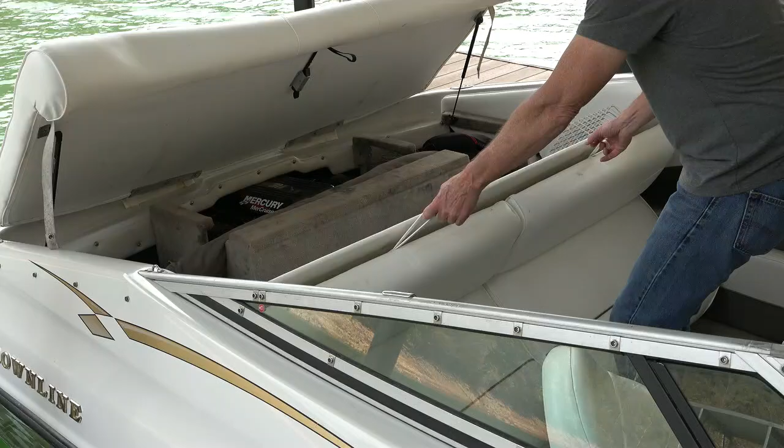You can do it with the little earmuffs while it's all out dry docked. That's another way to do it, and I'll show you how those earmuffs work when we get to putting the coolant in the motor. But the first step is to get access to the motor, which includes pulling up the back part and then pulling the seat forward. This is an important step so you get good access to the engine.

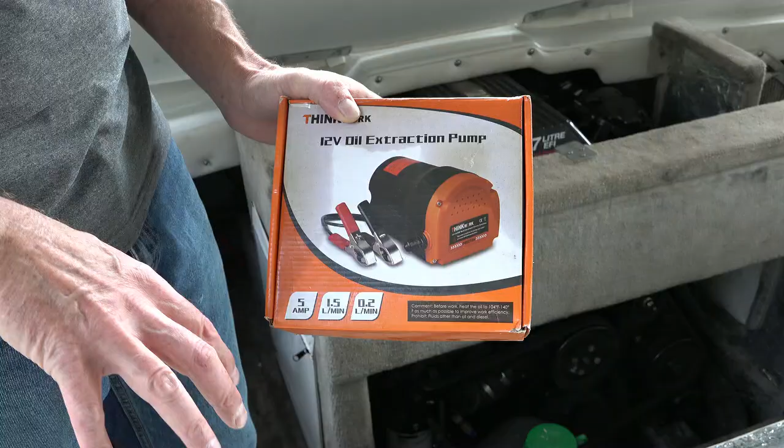Alright, so in this next step what we need to do is to get a little pump like this one to extract the oil from the dipstick into your container, and it needs to be warm to do this, otherwise this pump isn't going to work. There are a lot of pumps. This is just one I've used. It's worked pretty reliably. It does a pretty quick job. And I'll show you once I get everything inserted into the dipstick and start the process.

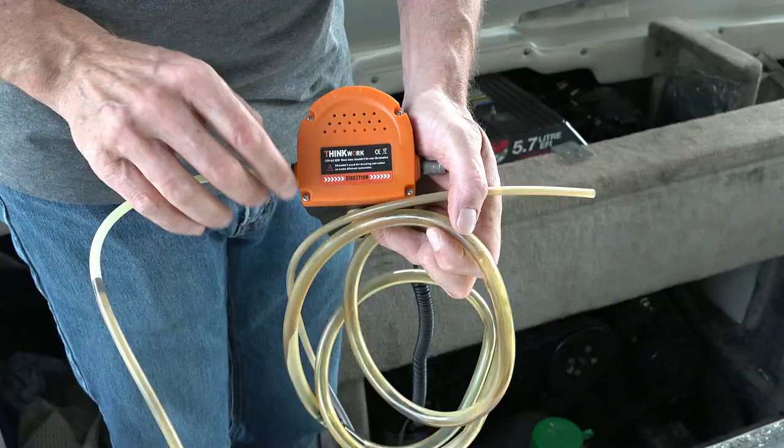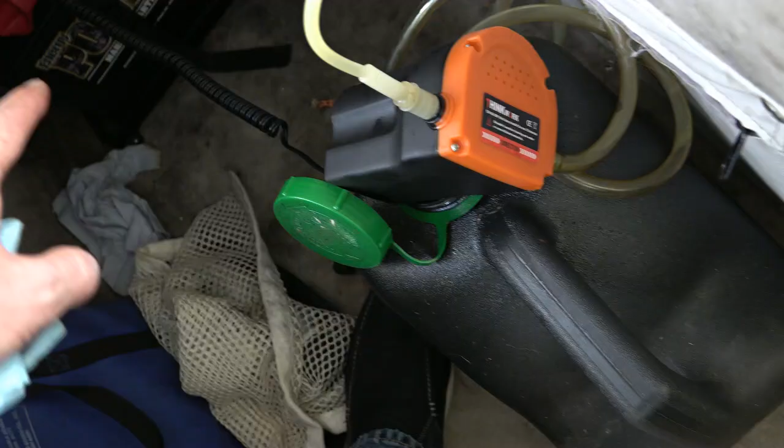Alright, on this pump you can see that there's a direction where the oil is going to go this way. So the real thin tube is going to go into the dipstick, and on the other side is going to go the thicker tube that's going to go into the refuse side where I'm going to dump the oil. Alright, here's your pump. I've connected the pump across the battery. You got a red clip and a black one, so they're connected. The pump is hooked up.

You'll see that this tube right here goes into your dipstick. I just pushed it down in there, and then as I turn the pump on, my goal is to make sure there's oil flowing through this pretty quickly, and I might have to adjust this tube by pushing it in and out to make sure I get good oil flow, which will be obvious. You'll see. Okay, here it goes. See how the oil's coming up?

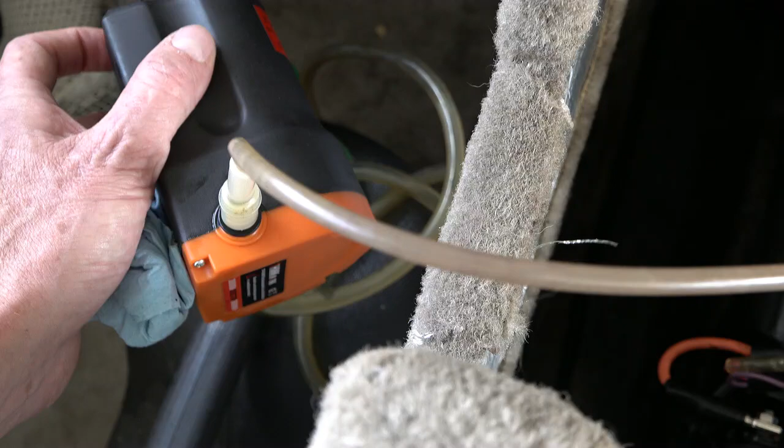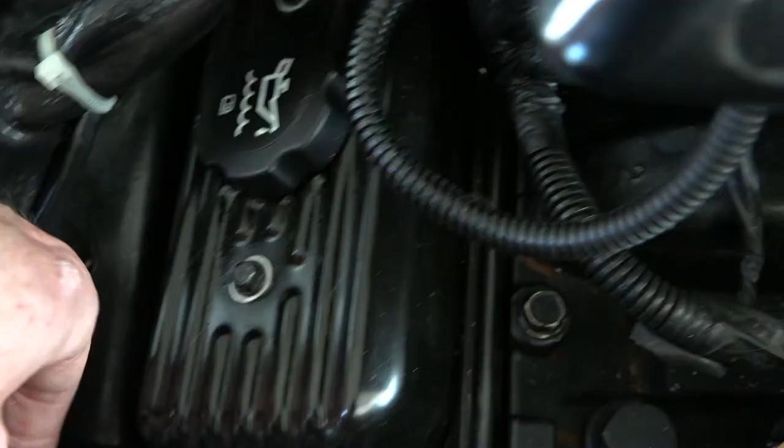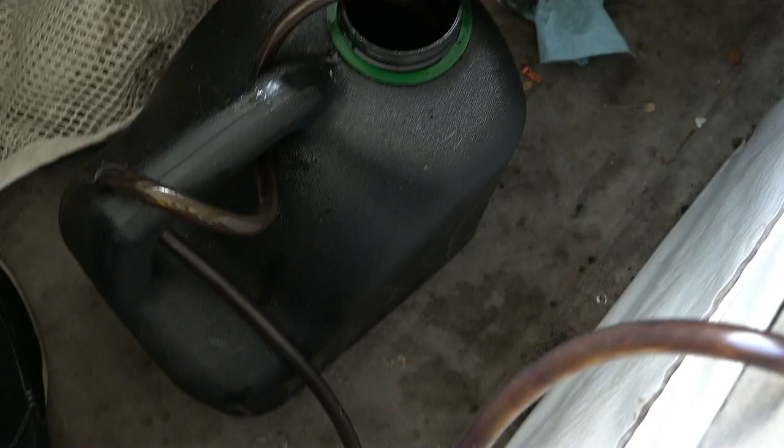Going to the pump. I'm going to adjust it now. There you go. Pushing it down made it really start to draw. Now I want to look at the other end. Probably take about, I don't know, 10 minutes maybe.

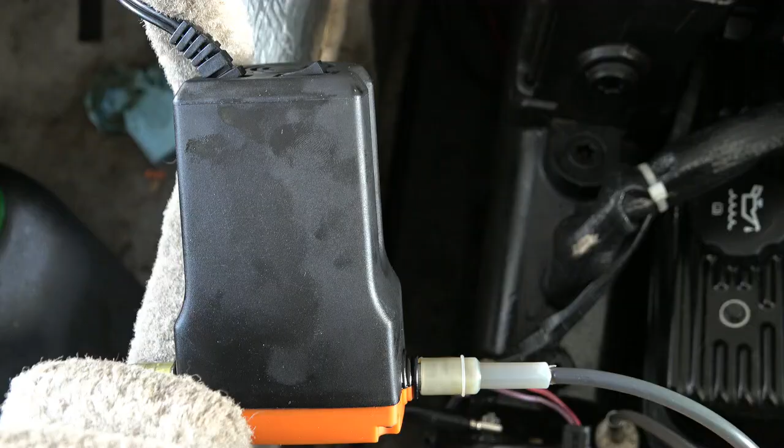Now you're gonna see here it's starting to spurt like it's running out of oil. And that just means that the tube is no longer completely submerged in the oil. So we're getting close to the end. Now what I'll do is I'll actually move this up and down to see if I can continue to get more oil. See if there's a good position for it where it draws more oil.

But eventually, after I get done doing that, and I'm not getting any more oil, I move on to the next step. Alright, so now I'm pretty much done being able to suck the oil I can get out with the vacuum. So now I'm going to disconnect these tubes and blow them out and make sure the oil is out of the tube so I can put it back in the box.

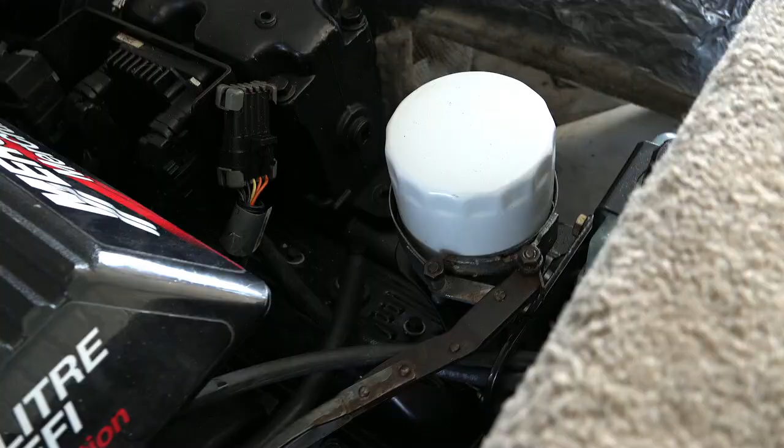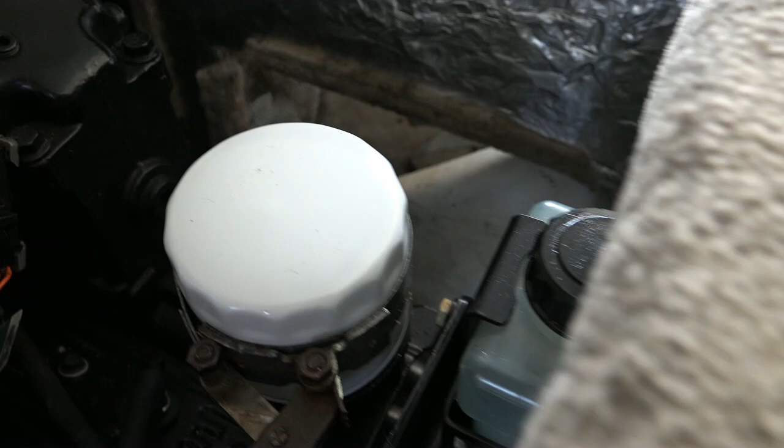Okay, and the next step, this is the oil filter. You'll notice that it's upside down, which means that it's going to leak once it starts. But my recommendation on this is to go slow. Just release it like I'm going to do with a standard oil wrench. And then just crack it.

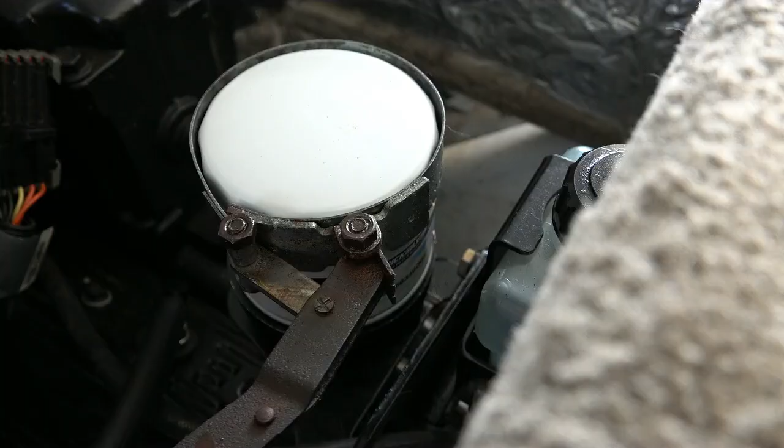Take your time taking it off and let the oil drain back into the engine block the best that it can. It might not be 100%, but what you don't want to do is spin this off really quickly and then have that oil in the filter when it's upside down and be plooping all over the engine. So you'll see here, I'm just going to take my time. I'm going to let that thing drain down, hopefully. Doesn't always, but I found that when I take my time on things, they usually work out better.

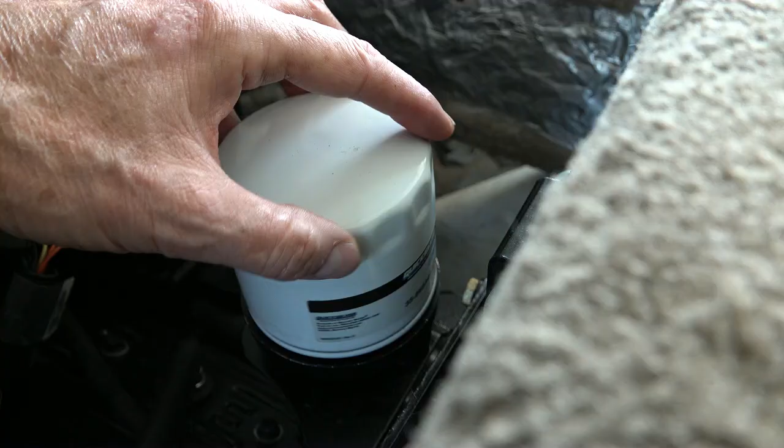You could put some rags around this or a bag, but I'm going to see if I can do this successfully and demonstrate. See, I can hear it actually draining right now. It's actually draining back. And now one more step I'm going to do, even though I've extracted the oil, is I'm going to drain what's left in the pan, and I'm going to show you that. So I'm going to get 100% of the oil out of this engine, including this little quarter pint of oil that's in this oil filter.

See? Take her slow. She's still going in. There you go. Success. Look at that. Now that will drain down, and I will be getting it on my next step. If not, you can just wipe out what's in there with a rag. But I didn't spill any. That's the important part. I didn't spill any.

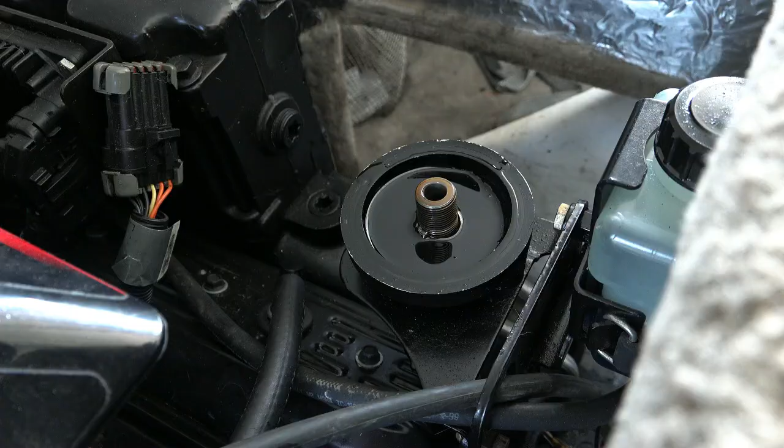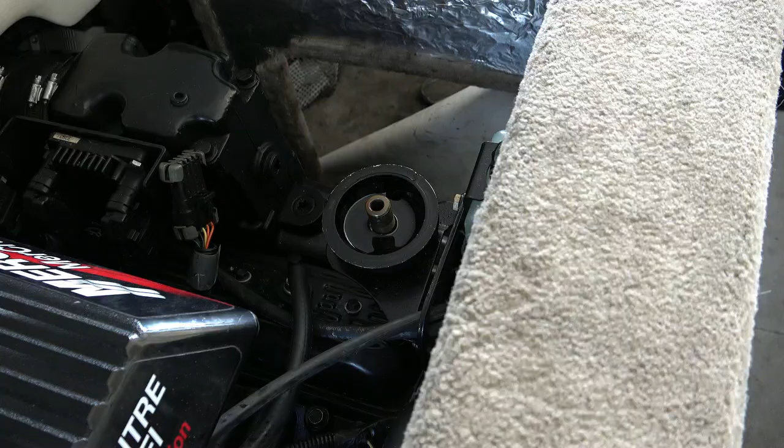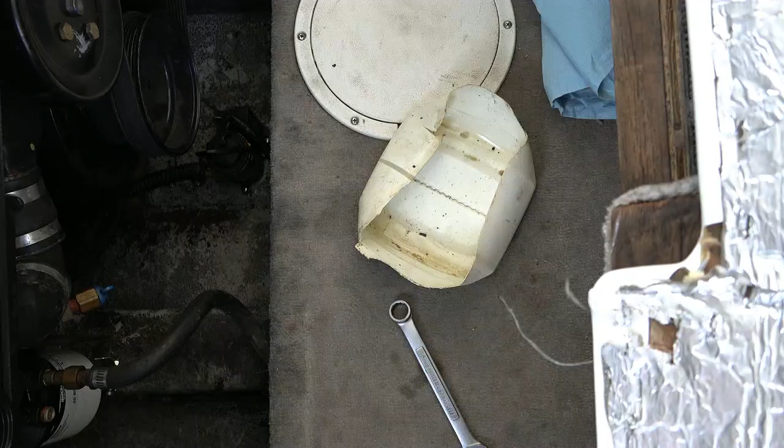See how that's draining down? That's the goal. Let it go into the oil pan. Now the last step, before I put the new filter on, is I'm going to take this little cut-off container, like a little juice container. Mine's a little flattened out because that's how I left it in storage. I didn't intend to do that, but I should still be okay.

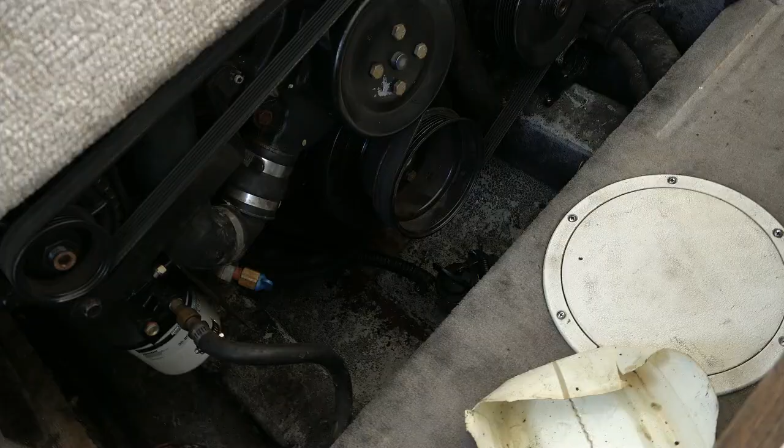There was probably another, I don't know, half quart of oil that's in the engine. And the only way to get that out is to take a 15mm wrench, go underneath the motor, and extract it just like you would a car. Pull the plug, let it drain into this little container, and then very carefully fish that container out without spilling it and pour it into your refuse container.

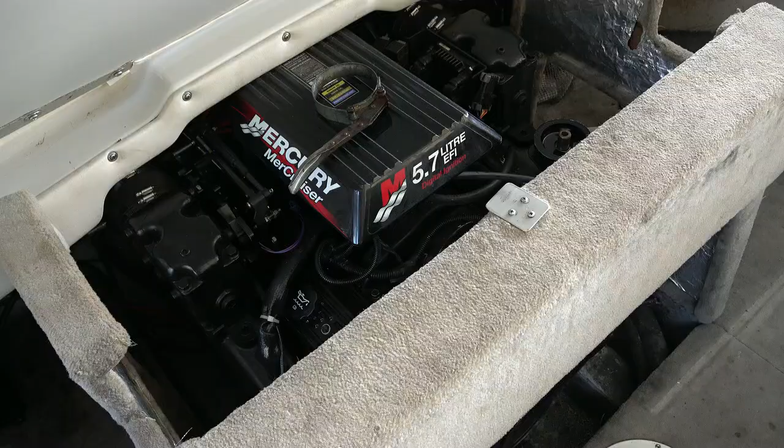Now, when you take your boat to the marina, they probably don't take that step. They probably just extract the oil and leave that half quart of oil in the motor, and they really don't have any ownership in it because they'll sell you a new engine if over time you need one. So anyway, I'm going to do this. I've always done it. I've been doing my own boat for 20 years now, and we're in Tennessee, so we do get freezing weather. So I've got to make sure I do it right.

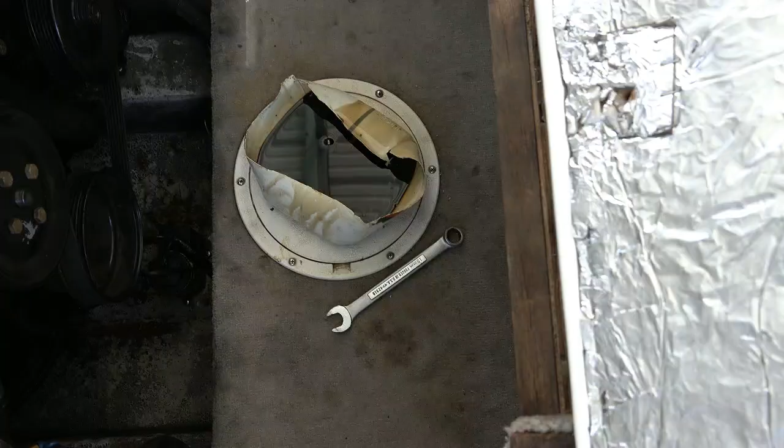All right, you can see how much oil. I would say there's probably a good half quart or better that I just got out of the motor. I spilled very little in the hull, which I will contain when I pull the plug. Now, the other thing I'll tell you, a little pro tip here, is make sure you don't have any water in the hull of your boat, because that little container is going to float around and make it more challenging to get it in the right place to collect the oil from the drain plug.

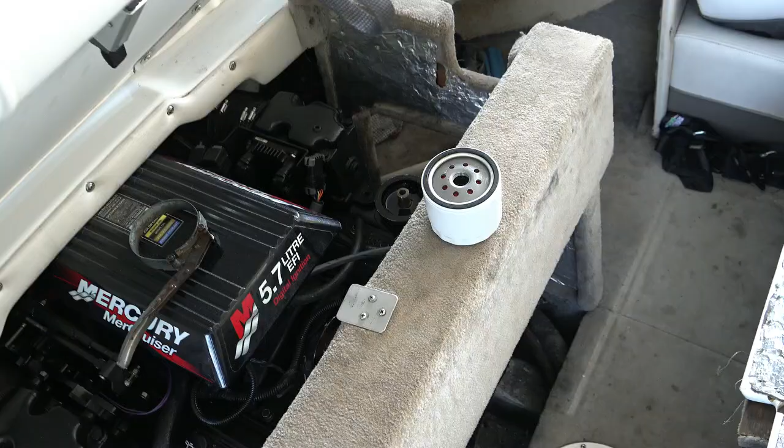All right, the messiest part is done, getting the oil out of the engine, and now we're going to fill it, but we're going to start first by putting the oil filter on. Now what you could do is dab this oil out there just to make sure you get rid of the last of the residue. Make sure that you have a good O-ring, and make sure the old O-ring isn't attached to the engine. There's nothing worse than trying to pressurize an engine with two O-rings on it. It makes a heck of a mess. So just watch for those. I've never seen it happen on my boat, but I've had it happen on my cars.

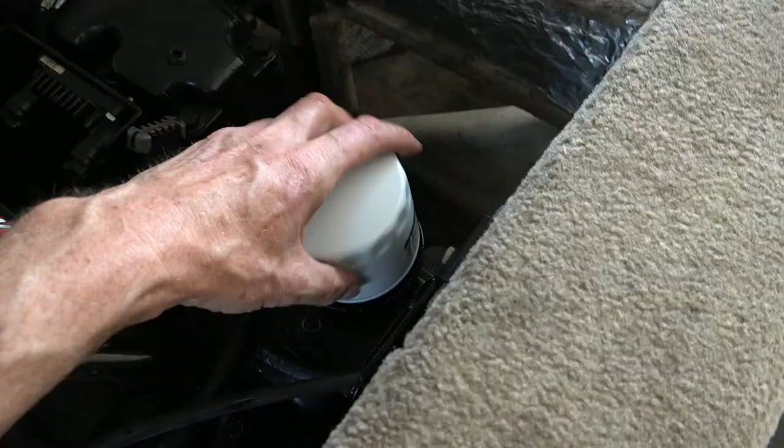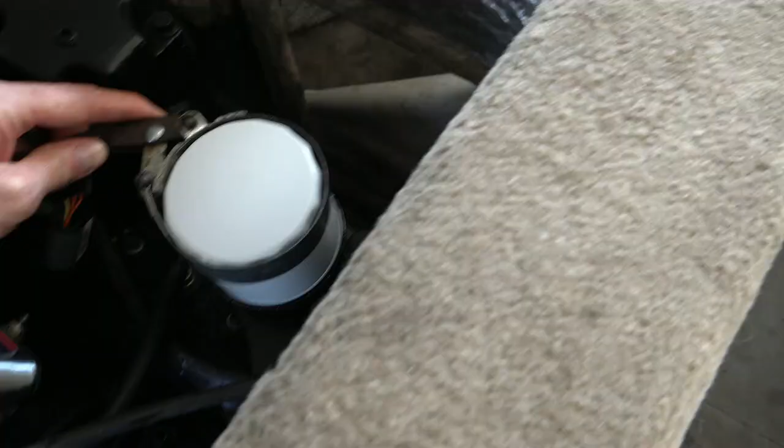All right, we're going to start by putting this filter on. Make sure it's the oil filter and not the fuel filter. They look very similar. I don't know if they fit; I've never tried to put one in place of the other. And then what you do is you hand tighten this as tight as you can get it, and then you give it a quarter turn. I don't recommend going more than that, just because this thing is on kind of a flimsy bracket, and if you get it too tight, you could make it really hard to get off without damaging something. So that's it, and that guy is on.

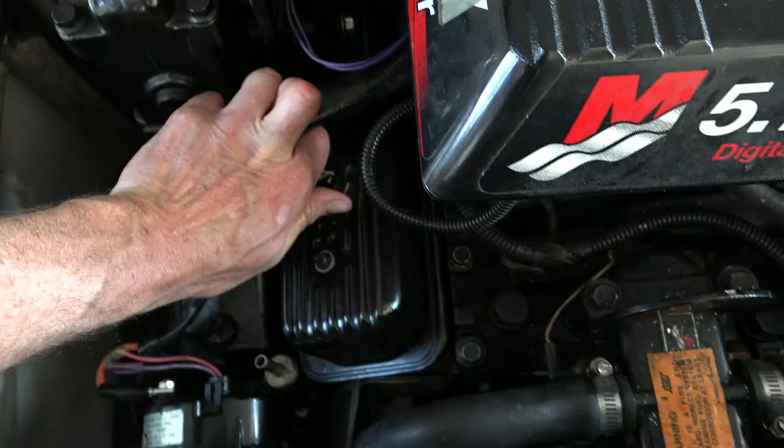Now the next thing we're going to do is pour the oil into the open oil fill side. I put in the Mercruiser oil, which I'll show you. I'm not going to show you how I'm pouring this in, but I am going to pour it in. I didn't bring my funnel, so I'm going to be very careful to pour it in that hole.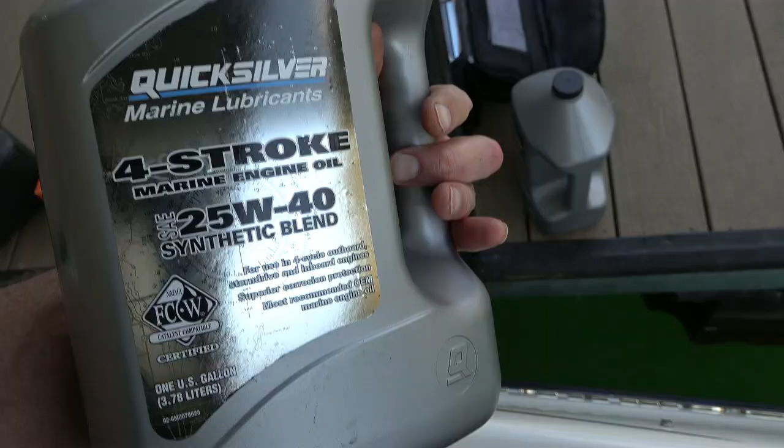This is the only oil I use. I use the Quicksilver 4-stroke 25W40 blend. I've even had marinas use straight 40 and all these other brands that are for cars. I don't do that. I just go with the synthetic mix that this is, and with what Mercruiser recommends. I just like to make sure. I just feel like this is the best viscosity for a boat in the kind of weather that I'm in.

Alright, I've got the oil full and I've got it to the top of the dipstick. Now the next thing I need to do is start the engine and fill the oil filter, because it's probably going to draw that down a little bit, and then I'll double check it and make sure it's full. The other thing is my boat is actually in the water, so this is a good way to check the oil, because this is how I want the oil level to be when the boat is running.

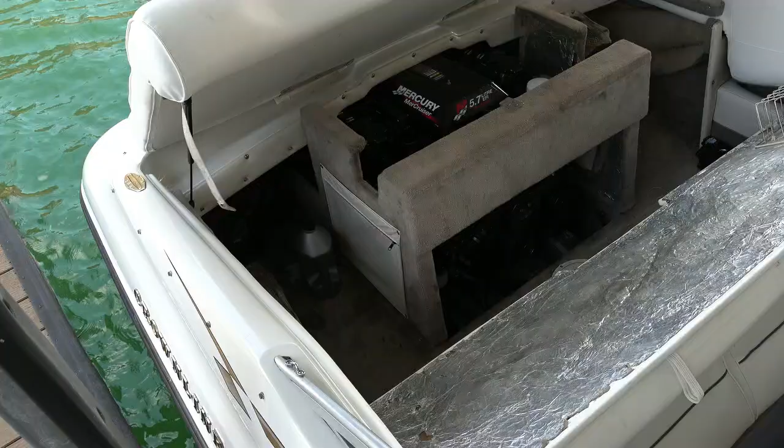Alright, the next step is we're going to change the fuel separating filter. I like to put some fuel in mine. I put gas, I put a little bit of Seafoam in it, and I like to have it about 2/3 of the way full, because when I put it on the engine, I don't want to have to crank the motor over a lot from a fuel starve situation until it fills the fuel filter. So the fuel filter is right behind that white cover, which I'll show you next.

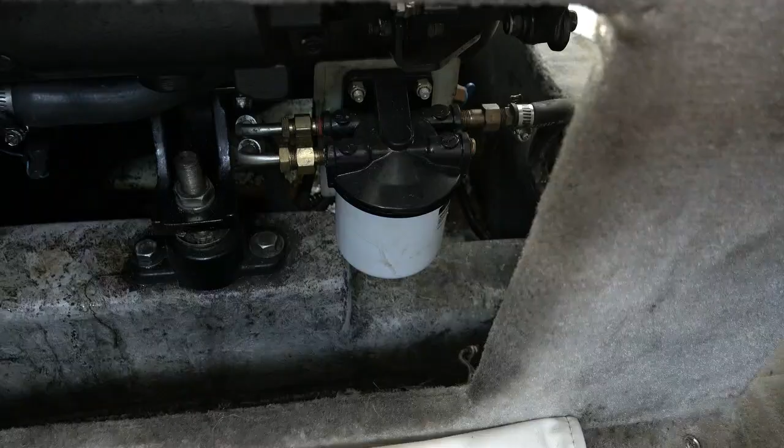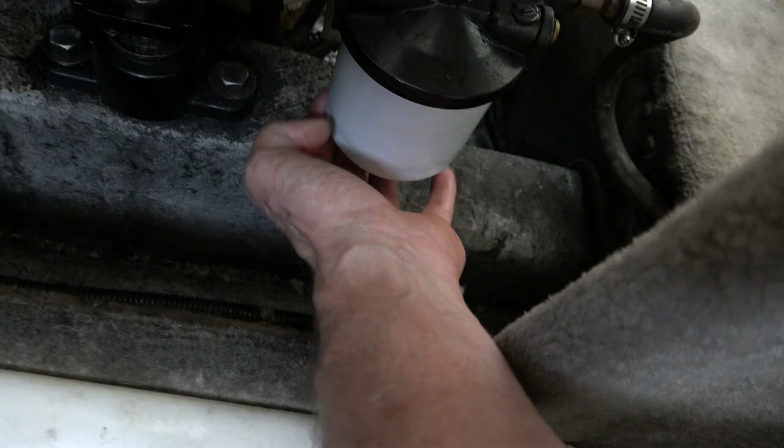Alright, here's the fuel filter on this boat, and you use the same wrench you used for the oil filter. And I'm just going to take it off and replace it with the one that I've put 2/3 fuel in. Remember the old rule, righty tighty, lefty loosey? That goes back to show you how old I am. But again, hand tight and a quarter turn. Really no more than that. Just don't want it to leak.

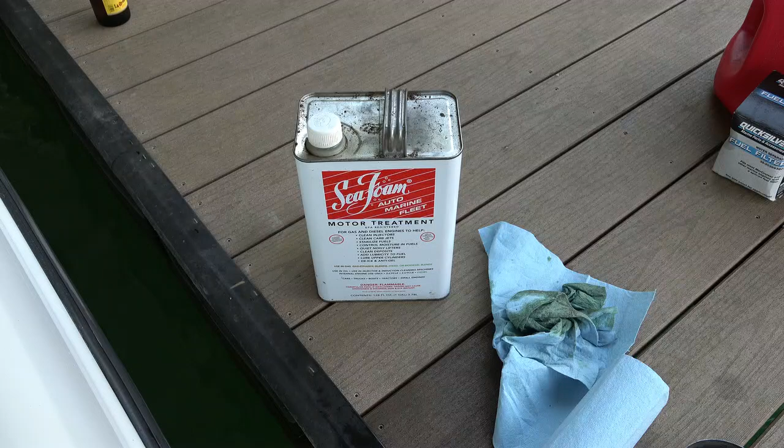And that's it. So now, last step in this part of the process is to put the fuel additive in, which I use Seafoam, and I'll show you that. Okay, this is what I use. I like it. It works well. It's supposed to be 2 ounces per gallon. I don't have a lot of gas in this boat, so I'm probably going to go with about 10 gallons worth of Seafoam. So it'll be 20 ounces. And then when I drive the boat over to the boat ramp to take it out to finish the winterization, this will be completely circulated through the system. And we're going to pour this in the fuel tank.

And this boat is now ready to be put back on the trailer, and from here we are going to do the lubrication, change the drive unit fluid, and then drain the water and fill it with antifreeze for the final winterization.

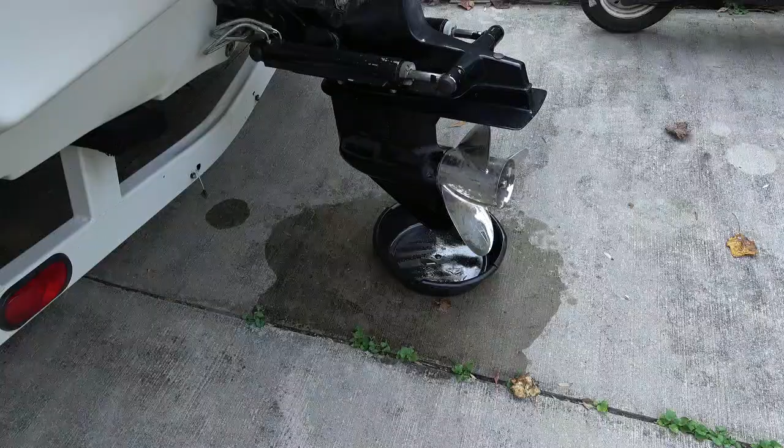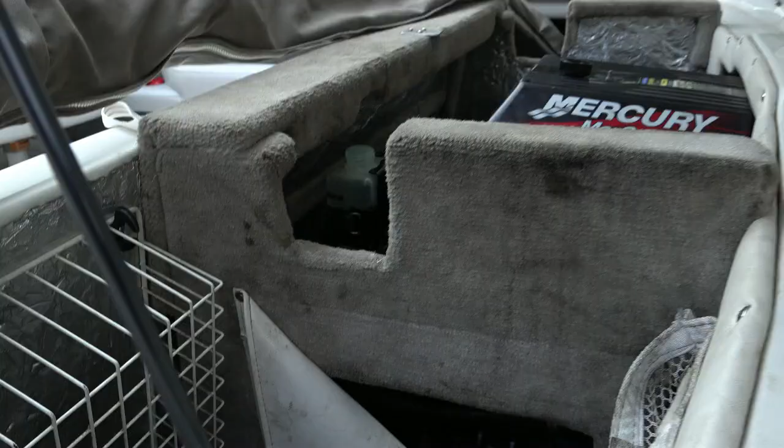Alright, boat's out of the water, plug pulled. I'm now going to drain the drive unit oil, and this actually takes more time than you think. It could take you a good 45 minutes to an hour for all the fluid, the 90 weight gear oil, to drain out of this drive unit. Now the other thing I want to point out is that one way to make it go faster, I found, is taking the lid off the overflow bottle. That way air can flow back through the system. It kind of vents it to allow it to drain faster.

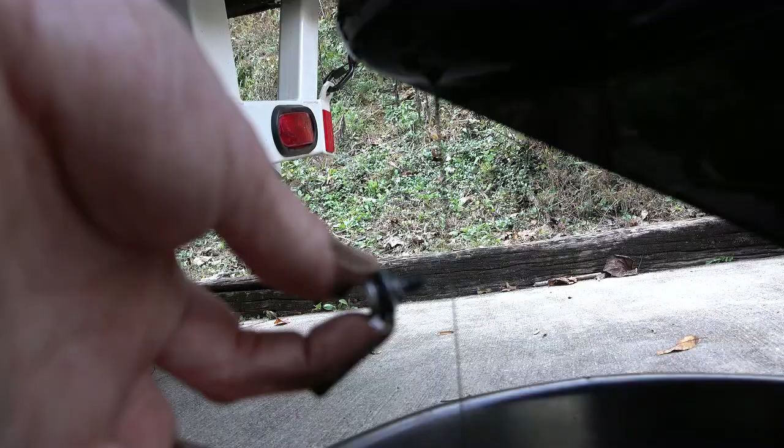So I'm going to pull that plug. I'm going to use the thickest flat blade screwdriver that I have, so I don't strip the little end plug. Okay, this is where it is. It's right here on the bottom of the drive unit. As you'll see, I'm going to take it off. And this boat's got about 1,200 hours on it, so it would not be unusual to find some shavings on the plug. There's this little magnet, and then you can see I've got some gunk on there. It's probably some shavings.

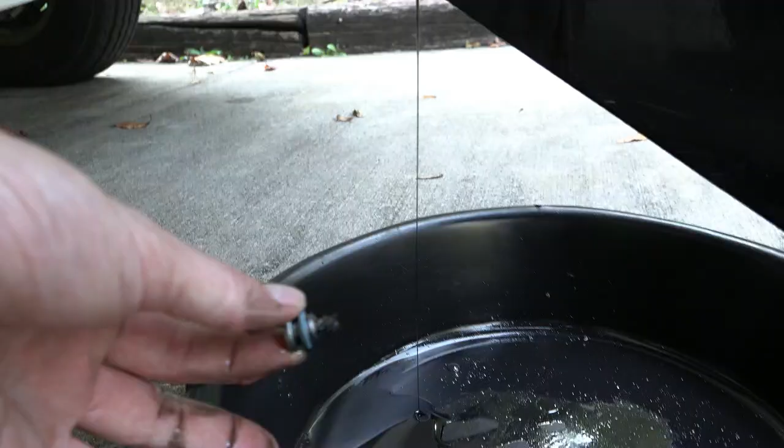That's been going on for 10 years. This drive unit still is really solid. I wouldn't necessarily worry about it unless you start getting other contaminants in the oil. Now the other thing I would tell you is if you get like a milkshake looking fluid coming out of here, that means you got water in it. And that means there's a seal problem, and eventually you will destroy the drive unit. Not right away, but eventually. So anyway, this thing's going to have to sit for probably a good hour to drain all this out. And then you'll really be impressed with what it takes to put it back in.

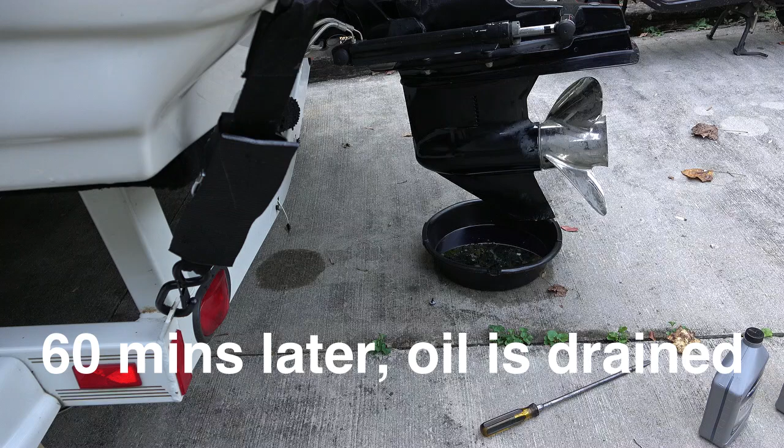Okay, the next part of this procedure is we need to take the 90 weight gear lube and feed it in through the bottom to force any of the air up through to the top of the drive unit. And so I am going to take this apart. It takes about 1.5 quarts. Hopefully I've got enough here.

There's actually a couple things you want to do. One is, let's get the air out of the tube before I attach it to the drive case, which is where the drain plug came out. So I'm going to prime the pump here and get the 90 weight gear lube all the way to the end. And then I'm going to attach it to here. And this is just screwing it on like so until I get a nice tight seal and it doesn't leak. And uncoil this. I just like to do it that way to make sure this tube's full before I start.

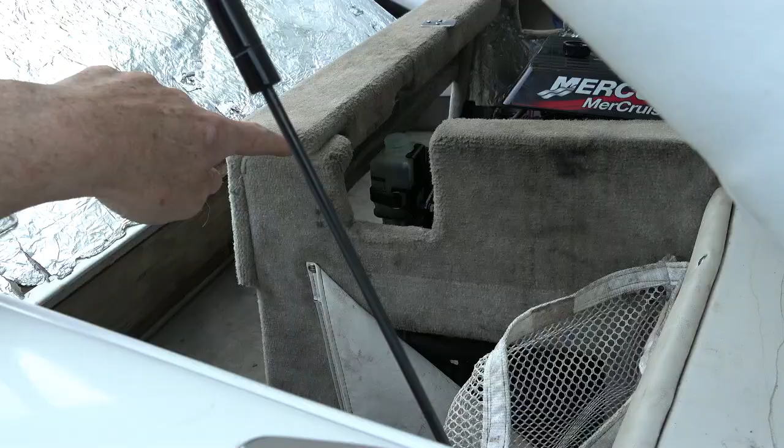And now I just continue to pump until I go through this whole bottle and half of another one. And then how you know you're done is you go back to the overflow bottle, which I'll show you right here, that we talked about earlier. That overflow bottle, right in there, you want to fill this until you get to the add line and then stop for a bit.

And the reason I say stop is because that oil has a way of expanding, and it'll keep flowing and filling that bottle and actually overfill it. So don't take it all the way to the top. Get it to the add line and then stop. Okay, so I am going to sit here for the next umpteen minutes and pump this thing full.

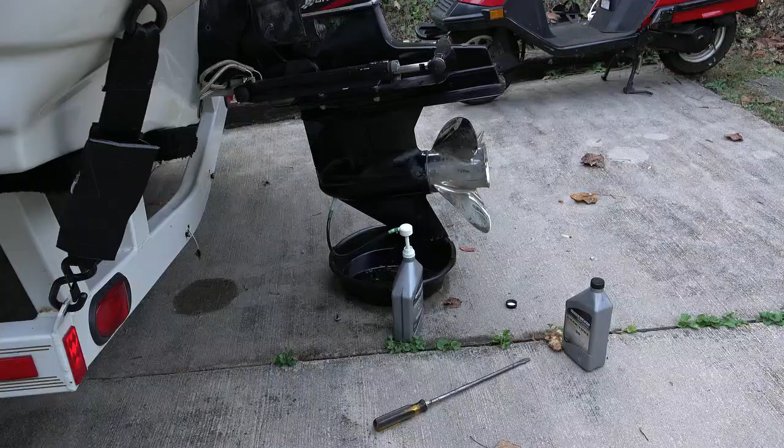Now you can see how the drive unit oil is starting to rise in the bottom of that overflow tube. So I'm actually starting to see it fill. So now I've got to be careful not to overfill it. One added note of caution is when you're switching bottles, because one bottle's not enough, make sure that you do not introduce any more air into the system.

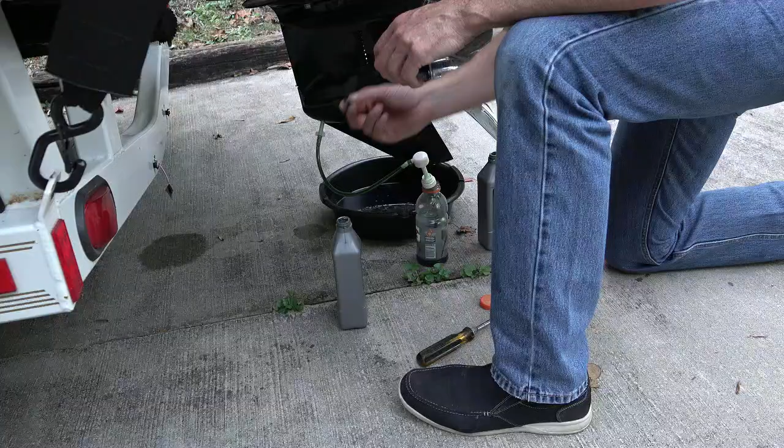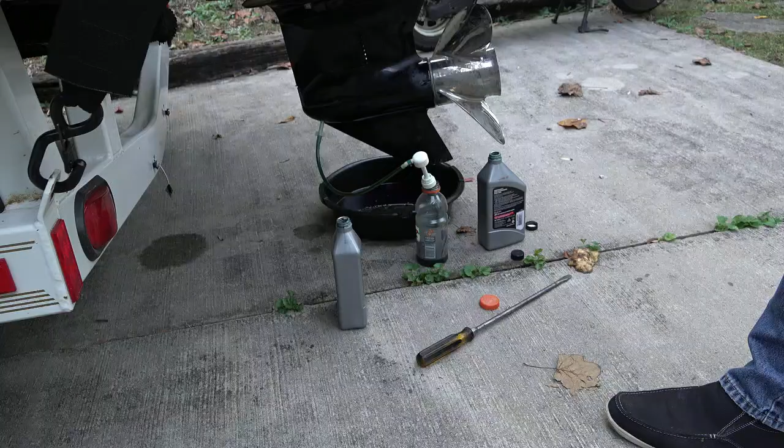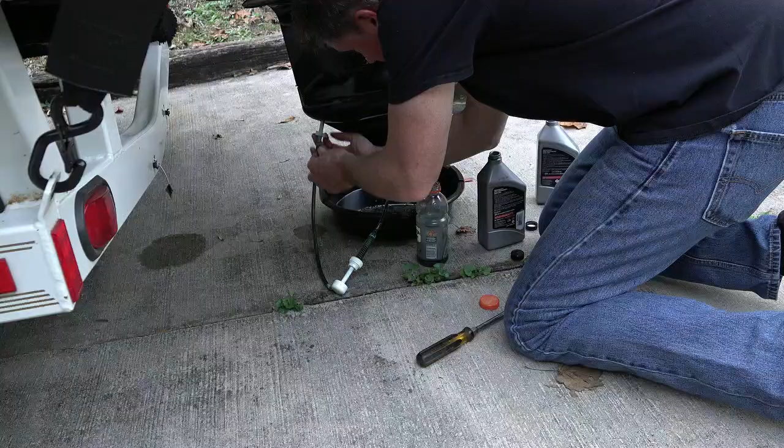Okay, now the next step to this process is I've got to put this plug back in in place of the tube that I have in here. So I pretty much got my drive unit full, my overflow bottle's at the add line. I'm going to just top it off when I get done. And then this is pretty messy right here because you've got to pull this out. It's going to want to clunk all over the place. And then you've got to just as quickly try to put the plug in without spilling it all out. So here we go.

As you can see, alright, not the smoothest one I've done, but it's pretty good. Didn't lose too much. Alright, now there's a little washer on there. It's not rubber, it's more of a gasket that you want to make sure you replace, or at least is in good condition if you're going to try to reuse it. I reused mine, it was in good shape.

And then after that, we get our big screwdriver out, we tighten this baby back down, and I like a big flat blade, and be careful not to strip the head. In fact, I will raise it up a little bit and get it a little tighter, but that's tight enough to illustrate what we're doing here. Now I'm going to pump out the leftover oil inside here, and we should be good to go for this part. So the drive unit is done, minus the fact I'm going to top it off on the top end just to get it to the add line after it settles.

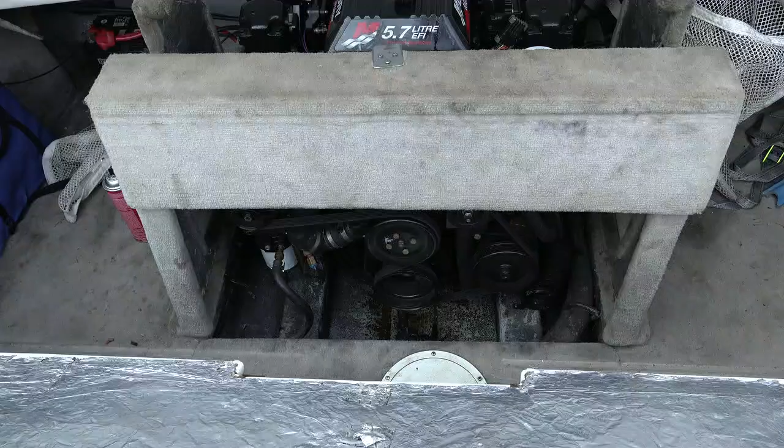Okay, the next step is to drain all of the water out of the engine, and the way you're going to do that is, see this little petcock right here at the bottom of the water pump, this little blue wing nut kind of thing? There's 6 of those on this engine because it has fuel injection. So there's one at the water pump, there's one on each side of the engine block, underneath on both sides, and then there's one on each exhaust manifold on the bottom.

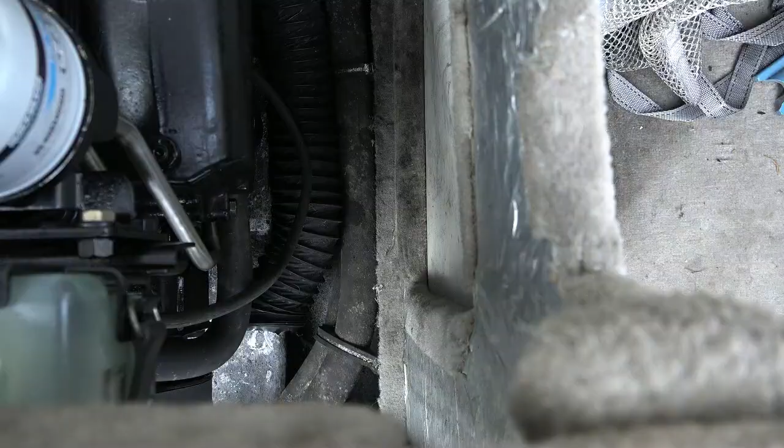So there's 4, this one's 5, and then because this boat is fuel injected, it's got a fuel injection cooling manifold that sits right down this side of the motor, and you have to really lay down on the floor, reach up underneath it, and take out the 6th plug. And what you want to do is every one you take out, the water should come out. If not, maybe stick something up in there and make sure that the water isn't just kind of trapped and that it comes out.

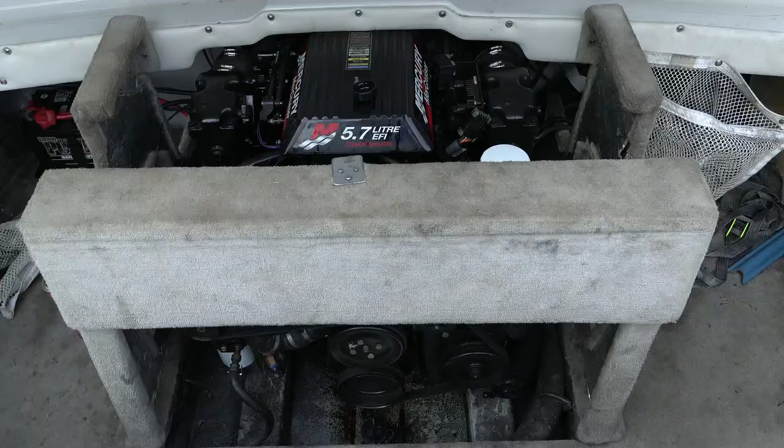Now, you're going to see how I do a belt and suspenders approach, just in case. But you know, you could really essentially drain your block, pour the coolant in, and probably be okay. But I like to run the coolant through with the engine running, just to make sure it gets in all the places. So you're going to see that here shortly.

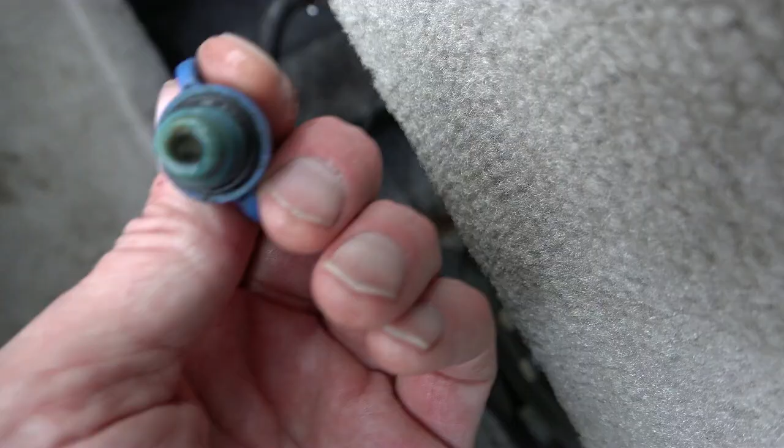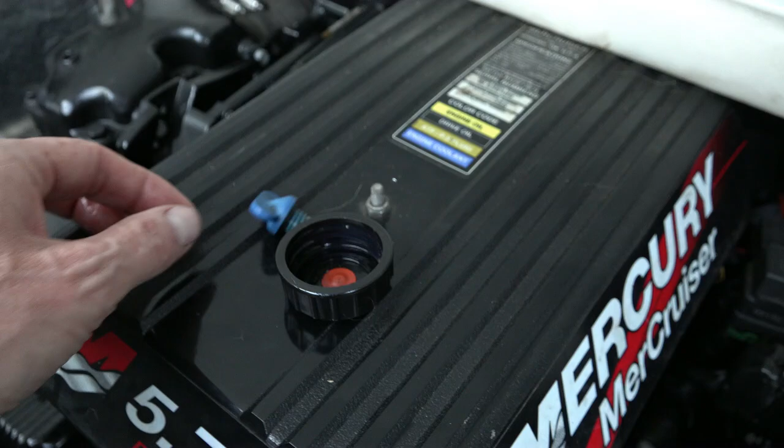Alright, now it's time to drain the engine block. I'm going to pull all these plugs. Remember, there's 6 of them. Some of these would be really hard for me to show you on a camera, but I will do my best. And there is a little O-ring on the end of that plug. Make sure you don't lose it. Make sure this isn't cracked, because if these break or crack or leak, they're just going to fill your boat with water. So I'm going to set them right here so I can count all 6.

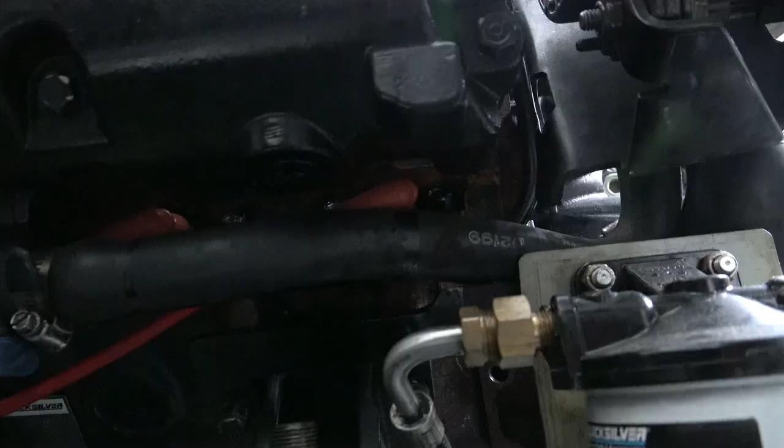Now remember, if your boat is carbureted, you might only have 5, because you're not going to have the one for the fuel injection cooler. So right here is one on the bottom of the exhaust manifold. This one's going to have more water than a water pump. The ones that have the most are the engine block ones, which are right here. Should have one right up under here. Hopefully you can see it. This one should really flush out some water.

And again, if it doesn't, get a little screwdriver or something up there and make sure that the water is being released. There's nothing like some rust chunk or something blocking it. I'm going to go to the other side of the motor and do the same thing. Okay, there are all 6.

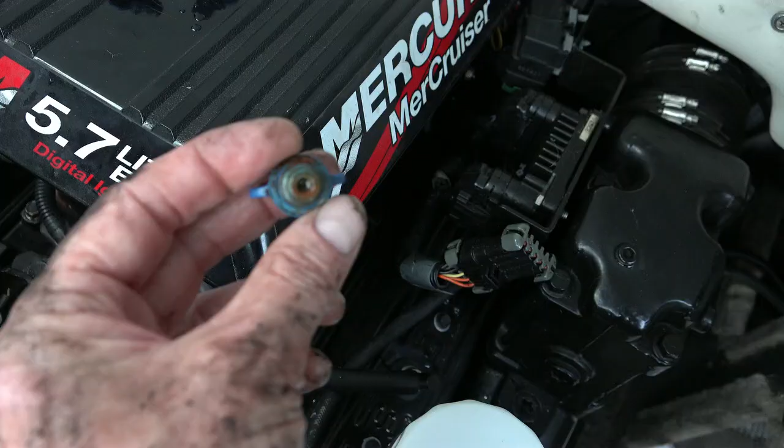You're going to notice though that I lost an O-ring on this one right here, which is for the port side engine block. So it's on the left side here if you're looking straight out the bow of the boat, and I am going to have to replace that. So I've got extras of these. I always keep them in case you have a cracked one, or like I just lost this O-ring. I double checked the fitting that it came from to make sure the O-ring's not stuck to it, and it's not. So it's probably in the hull of the boat somewhere, so I'm just going to go ahead and replace that one. Now what I'm going to do is wait for this engine to quit leaking out and drain all that water out.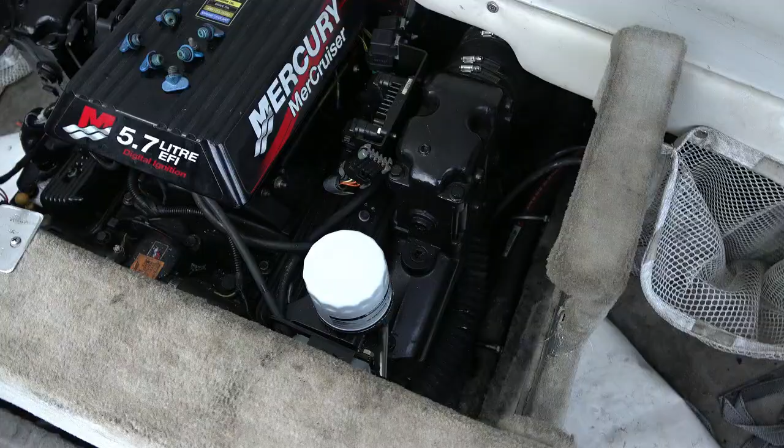This is the antifreeze that I use. I'm going to use 5 gallons, and I'm going to start off with pouring 2.5 gallons into the engine, and I'll show you through the hose that connects to the thermostat. I'm going to drain the engine, and I'm going to fill it with this manually by just pouring it in. So I buy my coolant from West Marine. I always buy propylene glycol. I do not buy the alcohol version, which is cheaper. That's really not good for your engine. This gives you the winterization capabilities that you need, along with the protection for your engine block, which is what you want.

This big tank right here, you're going to see me use it later, but that's some leftover coolant from last year that we're going to pump in there. So I'm going to fill the block, and then with the earmuffs, I'm going to start the engine and actually run coolant through the motor just as a belt and suspenders approach, to make sure any place where the coolant didn't actually go from pouring it in, it's going to suck it in through the main suction system, and make sure we cover all the bases.

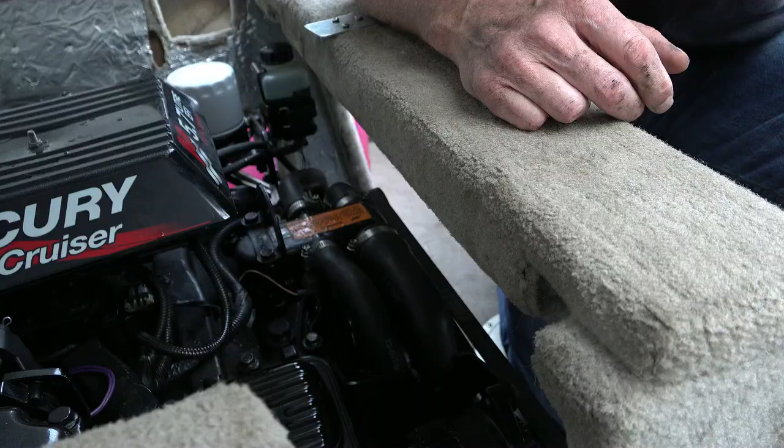Okay, now that all the plugs are back and the engine is drained, I'm now going to remove this hose right here, the same one I remove every year, from the manifold that connects to the thermostat. So hopefully you can see this. And I'm going to pull that tube off. The reason I know it's the same hose is because I've positioned the hose clamp so I can get to it easily from the top. And now I'm going to stick this funnel down there, and I'm going to proceed to put as many gallons of coolant in this motor.

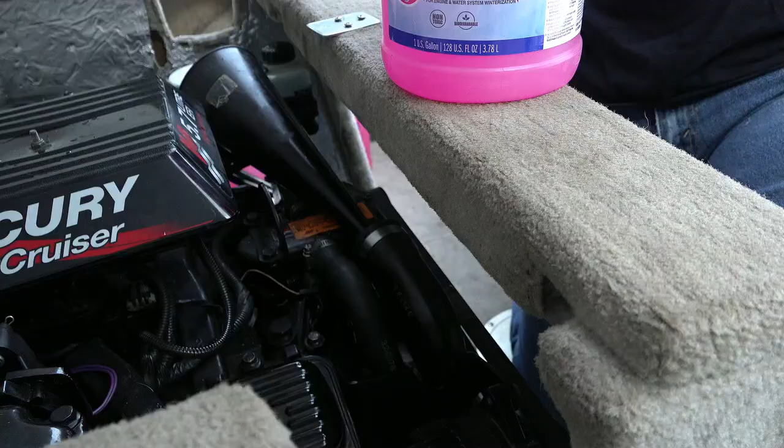And this motor's been sitting for a while, so it's not really that hot. I always hate to pour cold liquid into a hot motor because you could ruin it. So this one's been sitting for a while, and this isn't like cold, this is room temperature. But I'm going to pour this in here until the water starts coming out the other side of that manifold where I disconnected the hose. It's not water, it's antifreeze. Stand corrected.

Now what this is doing is it's going inside the engine and it's filling all those passages with coolant that's not going to freeze. And this is biodegradable, so when I go to flush this out in the spring, I don't have to recollect it.

Although you'll see I do collect it when I'm finishing this up, and I reuse some of it just to prevent some waste. I have a big container in the back there. I'll collect what comes out the exhaust manifold when I'm doing the final procedure on it. So this will take about 2.5 gallons before it starts coming out this part right here. I don't know if you see it, I hope you do. So I keep an eye on that because when it comes spilling out I want to stop.

Nope, it's not coming out yet. It's getting close. It's getting close. I start pouring this other one, it'll start coming out. These little foil tangs you get on the edge of these will be enough to spill all over the place when it catches one of those and flips it open. There it is. That's it. So it took a little over 2 gallons, and you can hear it. It's leaking right there, right where I took that hose off.

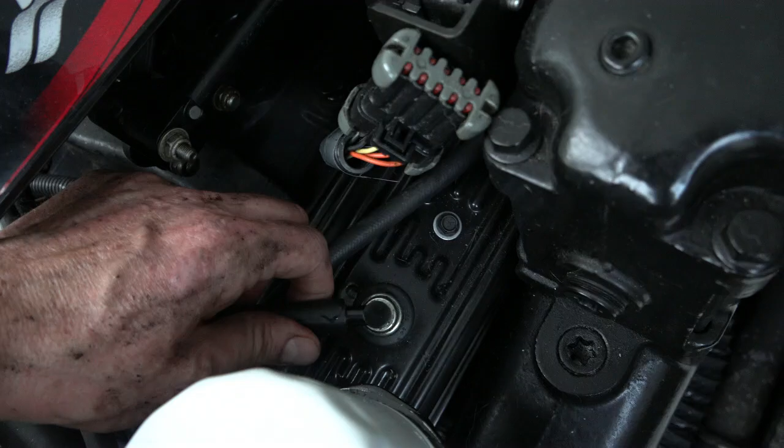Now what that's going to do is it's going to suck the coolant into the motor, and eventually it will meet this other coolant I just poured into the engine and then start to spit it out the exhaust in the back. As it gets toward the end of that bottle, I'll ask her, how close are you to the end of this bottle? As I'm standing there with the engine running, it'll be noisy. I'm going to then come up and pull this PCV hose, PCV valve, there it is, on the port side of the engine. I'm going to pull this off, and I'm going to take fogging spray, and I'm going to start to just load the engine up with fogging spray at the end, probably last 30 seconds of runtime.

And the reason I use this particular hose is I really don't want to put the fogging spray through the throttle body. I want to put it under the throttle body. And this PCV valve is a vacuum under the throttle body, at the manifold level or at the bottom of the butterfly doors, and it's going to suck that in, coat the cylinders, last 30 seconds, then I'm going to kill the power, and that's it. Now when I go to start this in the spring, it's going to give a puff of blue smoke as it burns that off, but it's the way to protect the cylinder walls, and that's how I do it.

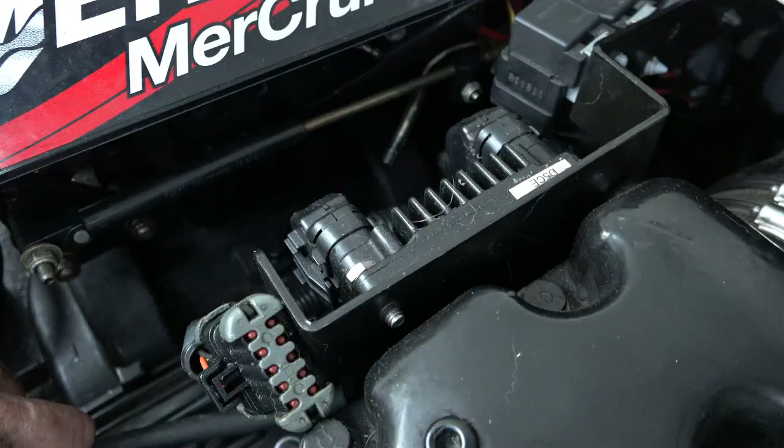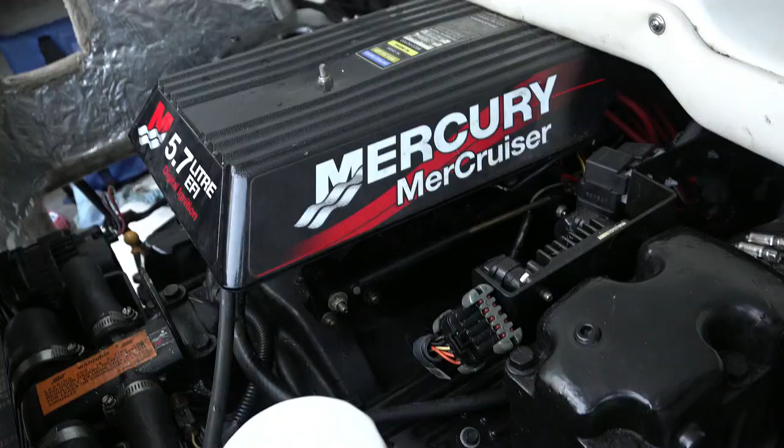I just pull that hose off the PCV valve, and there's enough vacuum, it just sucks it right in. Otherwise, they tell you to take this off, and you have to disassemble this, and then you have to spray it through the top, which you can do. I just do it this way because I think it's just simpler and it's more effective. This is what I use for fogging oil. It's actually Storage Seal. So this is why I spray in that PCV valve line.

So this is how we have this tank set up, where you got to keep that hose between the tank and above the place where the earmuffs are. And the earmuffs are right here. So if this hose was shorter, then I wouldn't worry about it. But if that hose drips below those earmuffs, it'll create an air pocket, and this fluid will not flow through the drive unit. So she's going to hold it just so the hose is in between, and you'll see that pink going through when I start the engine. It starts drawing it in. And then toward the end, I'm going to fog it. Okay, you ready? Mm-hmm. Turn it on? Yep, turn it on.

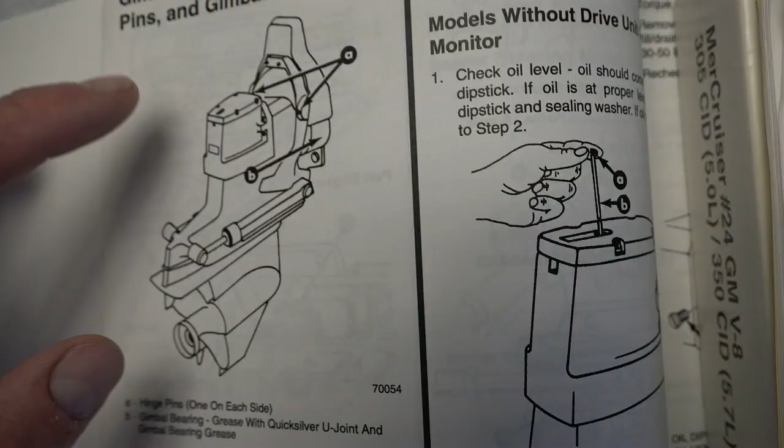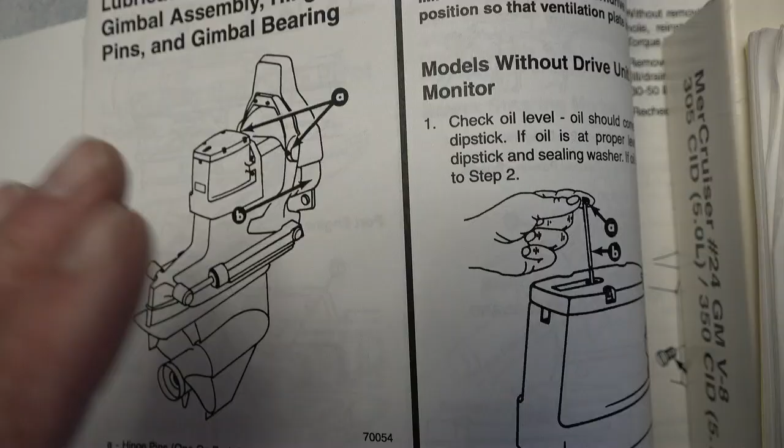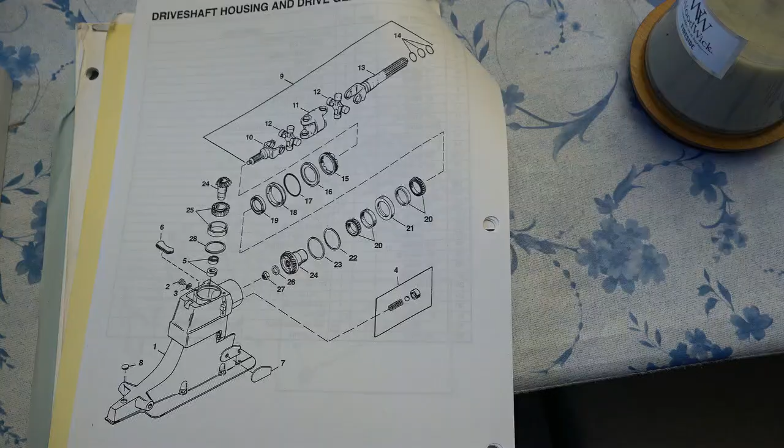Here are the three grease zerks on the outdrive. You've got one right up here on the side of the transom, and then you've got the two pivot points where the drive unit goes up and down. So there's three grease zerks right there. There's a grease zerk that is on top of the sleeve that slides over that spline on the engine, which is, you have to pretty much